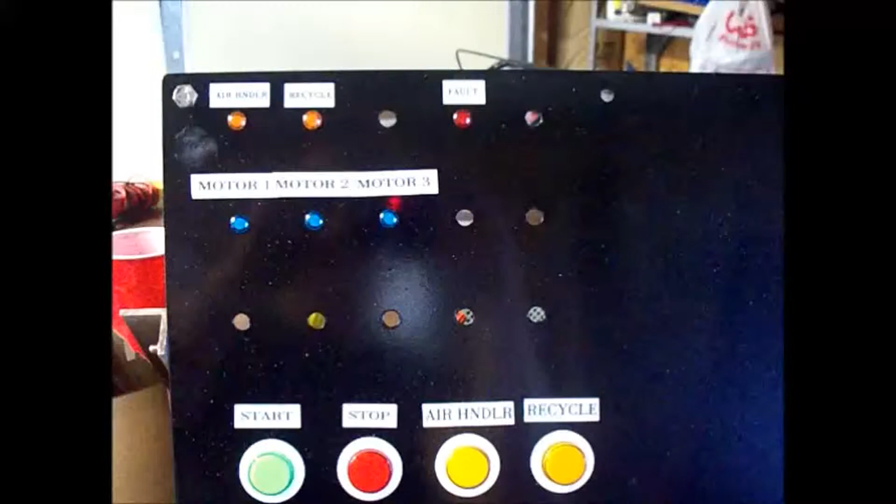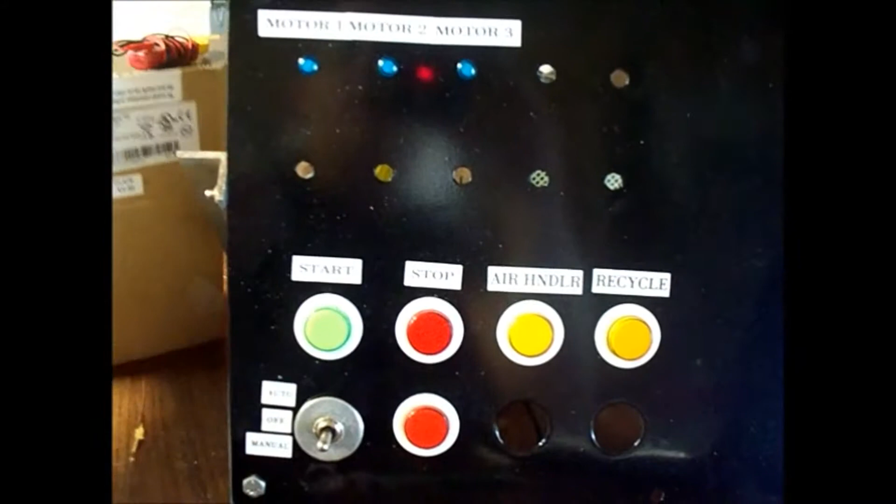This is going to be the first project that we're going to do with the Click PLC. It's the 110 version, input, relay, output, 3-COM port with the RS-485 included, not just the two 232 ports.

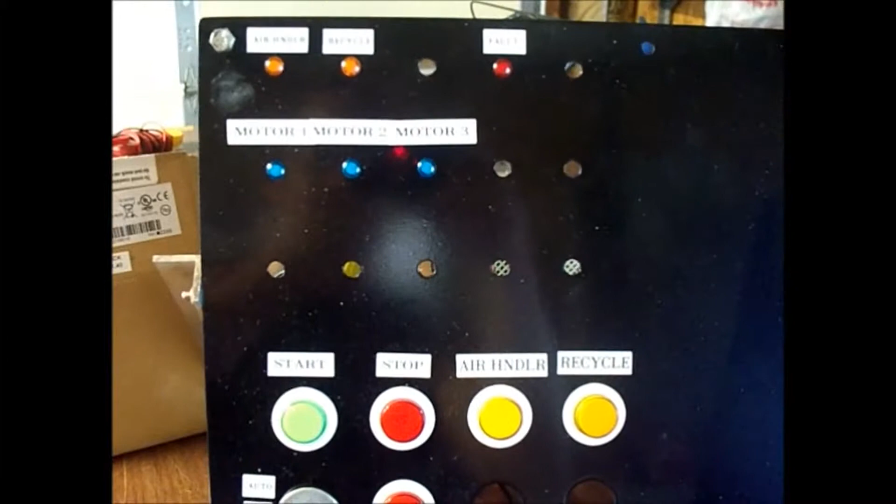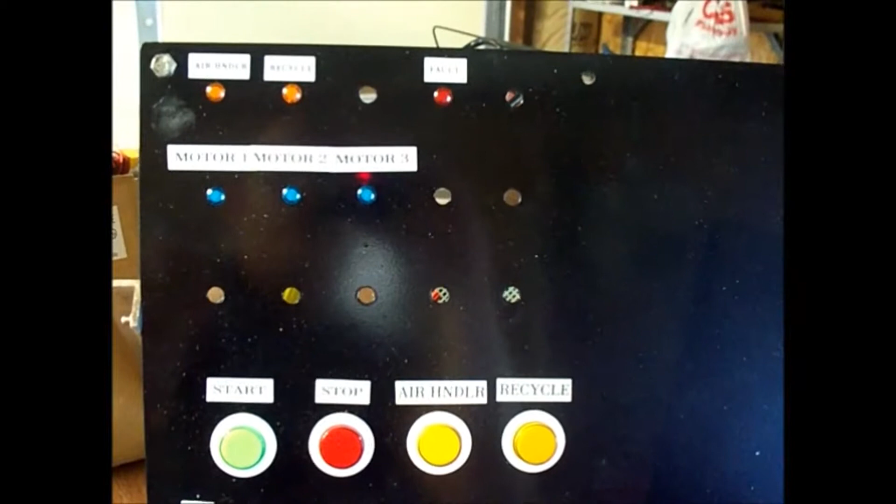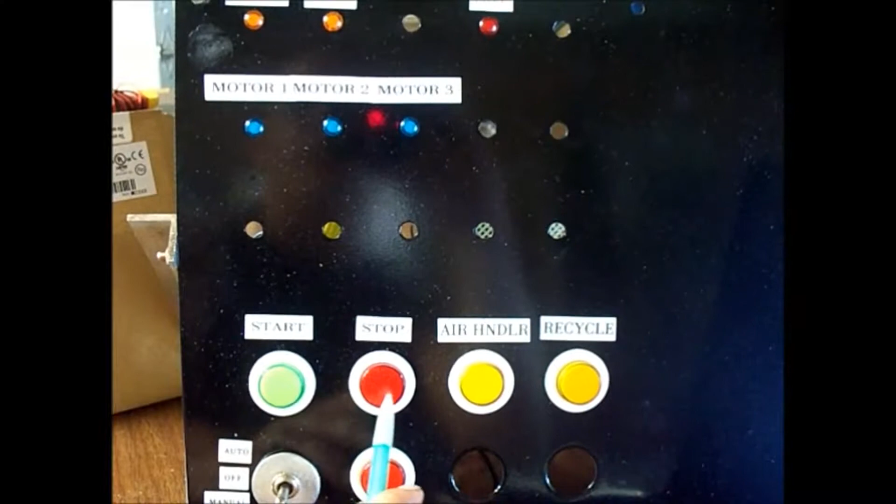This is a mock-up panel for me to do a lot of these projects, so it's not arranged for permanent fixture panel type stuff. This is just so I can configure different lights as outputs and different push buttons configured NO or NC for inputs.

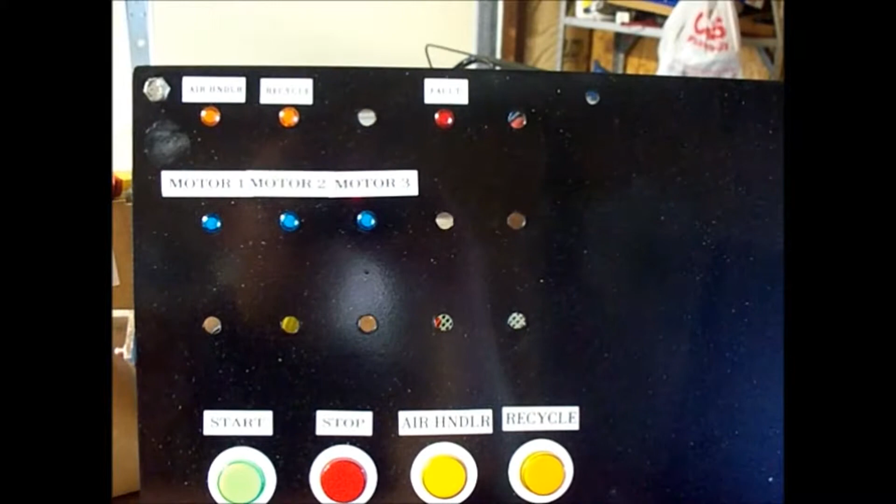This particular one that we're going to be doing is kind of modeled off of an idea I had after working on an abrasive blast machine that's got some really old control. Don't get me wrong, when it was commissioned it was probably the most current thing out there, but nowadays...

Okay, sorry about that. We had some full memory on this camera.

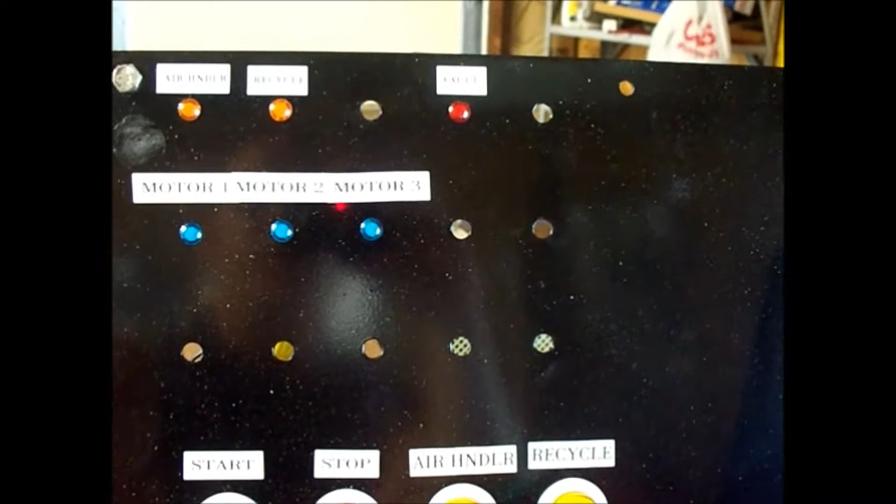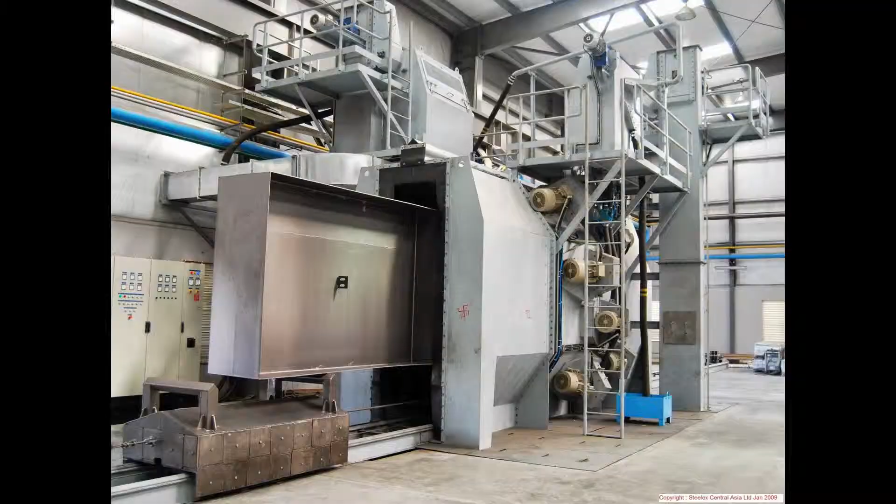Anyway, the control system on the machine that I kind of got this idea to do this for is pretty outdated. It causes some problems, and I kind of want to go through what some of these things are, what this machine does without having to draw a picture. It's an abrasive blast machine.

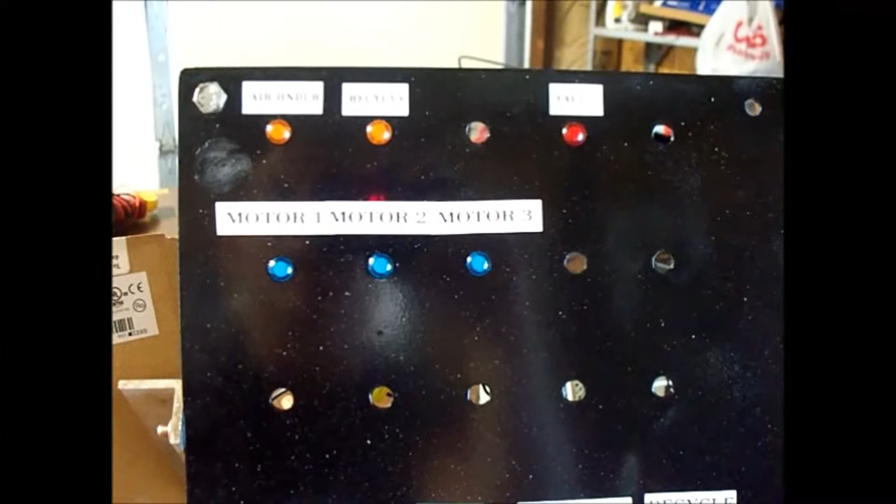It's a wheel type blaster where it has wheels turning, casting, throwing shot or abrasive blast media down on the workpiece very, very fast, and this abrades mill scale and rust off of metal. The wheels are powered by motors. The wheels are directly coupled to the motor shafts in every instance I've ever seen. And here, these lights are going to represent outputs of 3 motors.

These machines create a lot of dust, airborne fines and particulates, so there's always an air handler with a baghouse filtration type system, and this light is the output for it.

This light represents the recycle system, which can generally be several motor starters controlling motors that by mechanical means, after the shot or abrasive blast media has hit the workpiece and fallen to the bottom of the machine via gravity, the recycle system with augers and conveyors and elevators mechanically

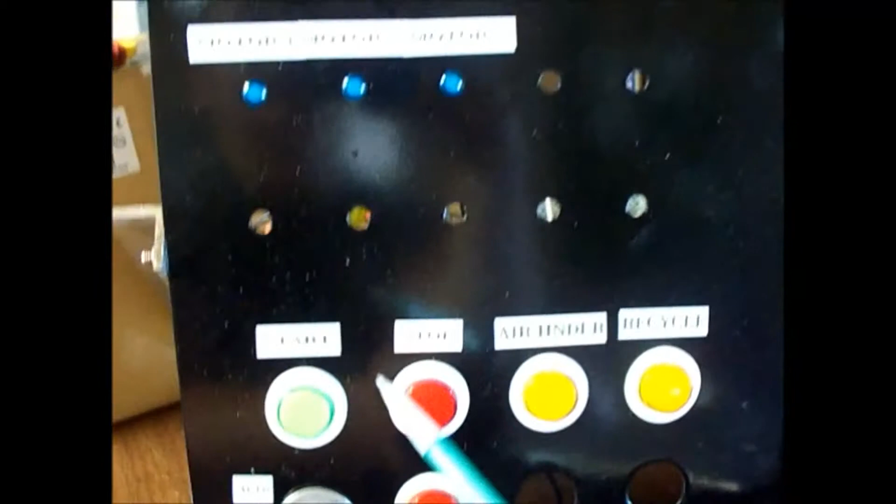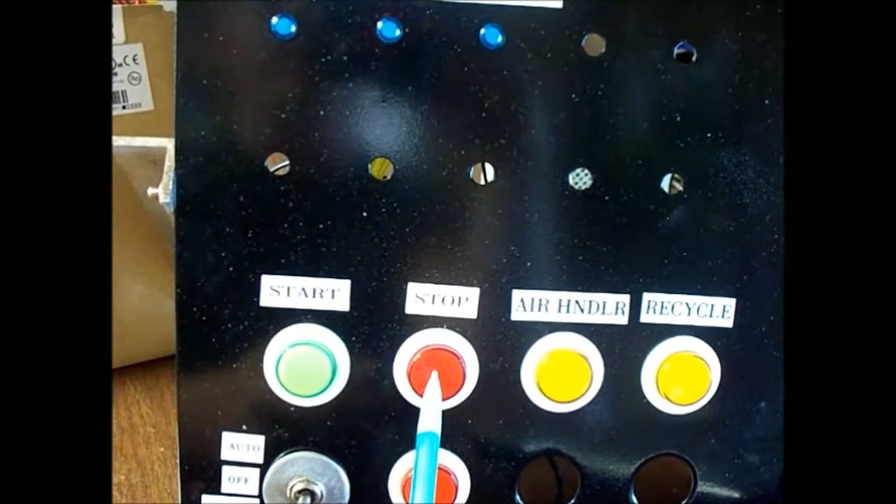Down here we have a start, and that's going to kind of auto start the whole system in a timed, orderly fashion. We have a stop, and this is an all stop. It doesn't replace an e-stop necessarily, but it's going to stop everything all at once, no order whatsoever.

This is a way to turn on your air handler manually. This is a way to turn on your recycle manually. Those are important because a guy can be cleaning up his machine.

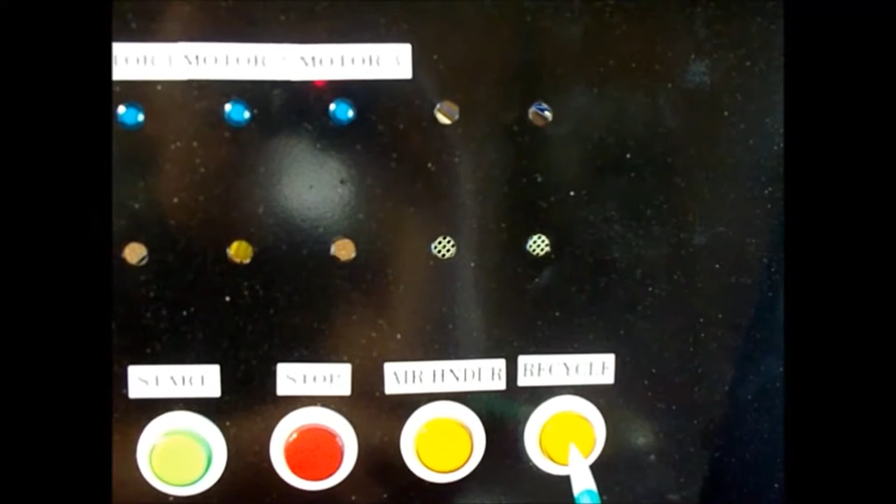If any material has gotten onto the floor and he needs to put it back in the machine, he doesn't have to climb up on top of it and put it in the hopper. He can run the recycle and just sweep or blow the abrasive material back to the machine where it will be recycled back up to a top hopper.

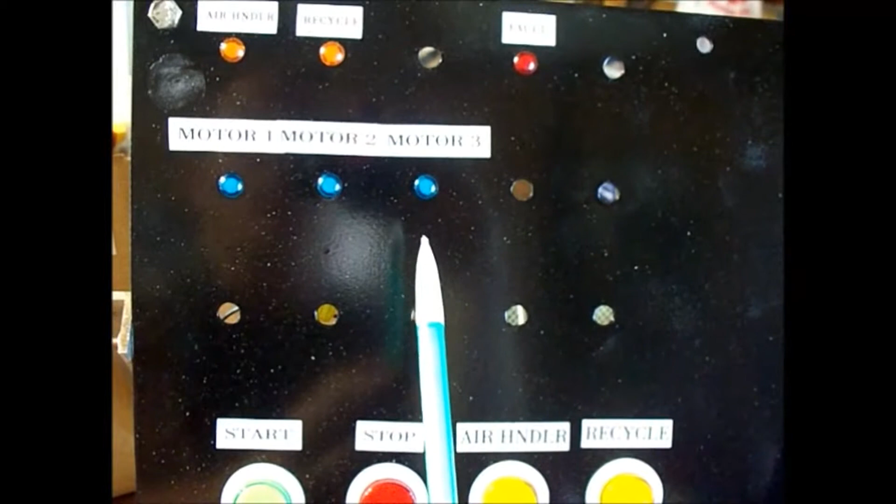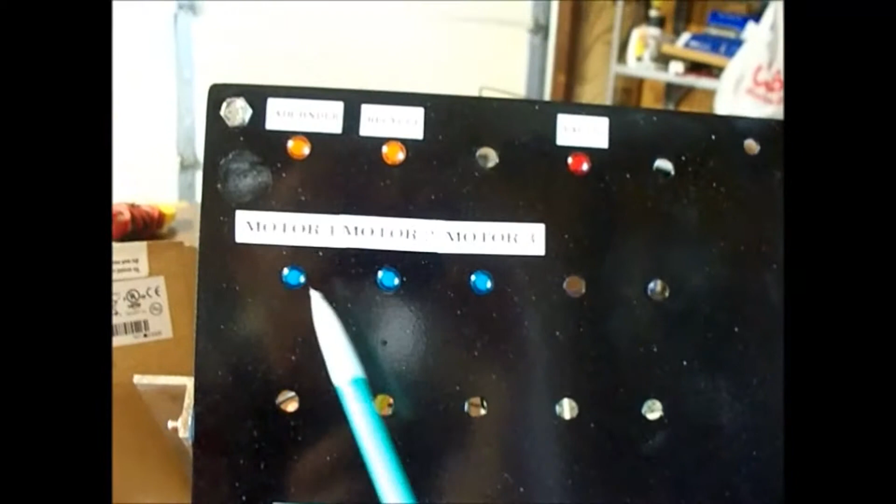While he's doing that, he may want to be breathing some clean air, so he can turn this air handler on manually. He can stop it with the stop button. He can stop the entire cycle after he hits start with the stop button. He cannot turn on the wheels, the motors, manually. We want control of that. We want to put conditions in before those motors will come on, namely air handler and abrasive recycle.

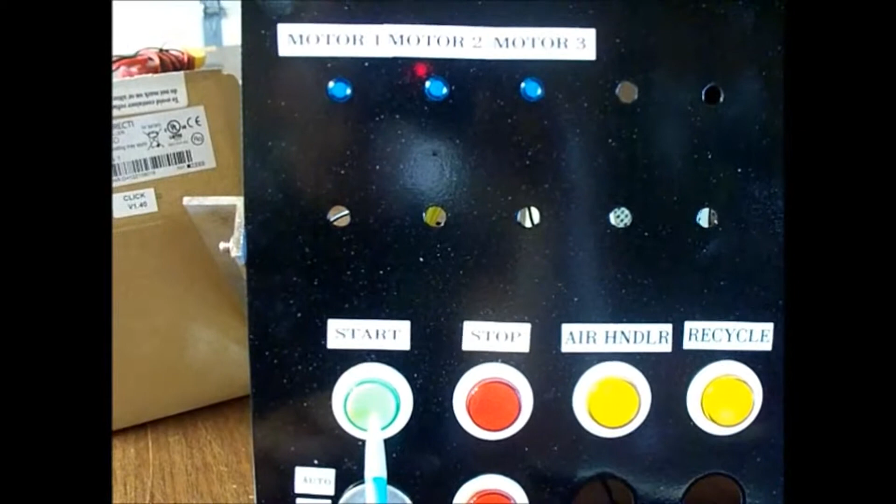So that's what this start button does. It takes the order and fashion that things happen out of the control of the operator, so he just starts it or stops it. Don't pay attention to this toggle for auto, off, manual. This is kind of a setup for some other different things that I've been doing. It doesn't apply to this.

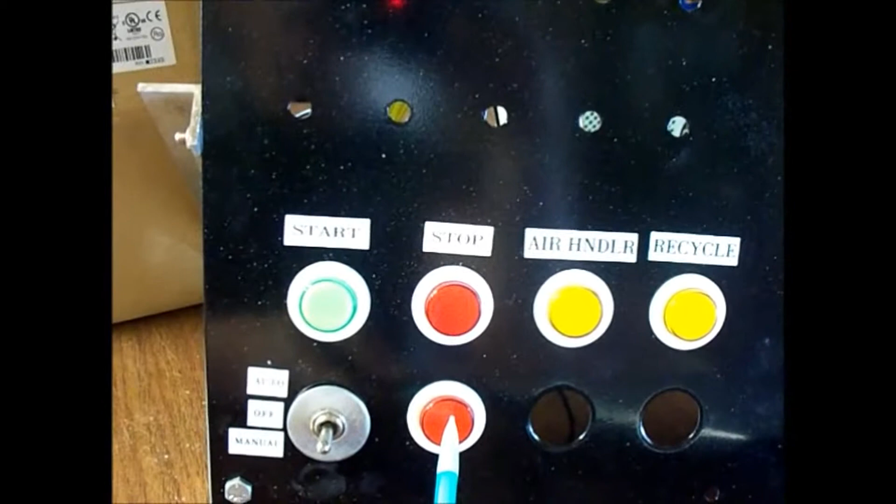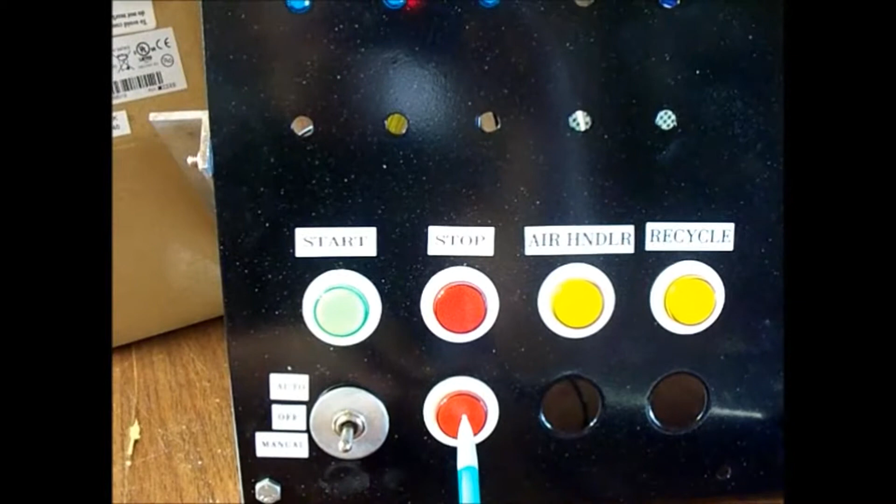This stop button that I have not labeled, yes, I haven't labeled, is kind of an organized shutdown, organized stop. This is when he wants to finish his blast session. He can hit this button. And unlike this one, which shuts everything off at once, this one will actually cut things off in an orderly fashion to prevent any jam-ups.

What it will do is, first it will shut off the abrasive blast wheels. It'll stop throwing the abrasive material. It will wait for a little while. Then it will turn off the recycle. After it feels that the recycle system has caught up with whatever was in the bottom of the machine, then it will turn off the air handler, at which point everything is reset and he could restart if he wanted or walk away.

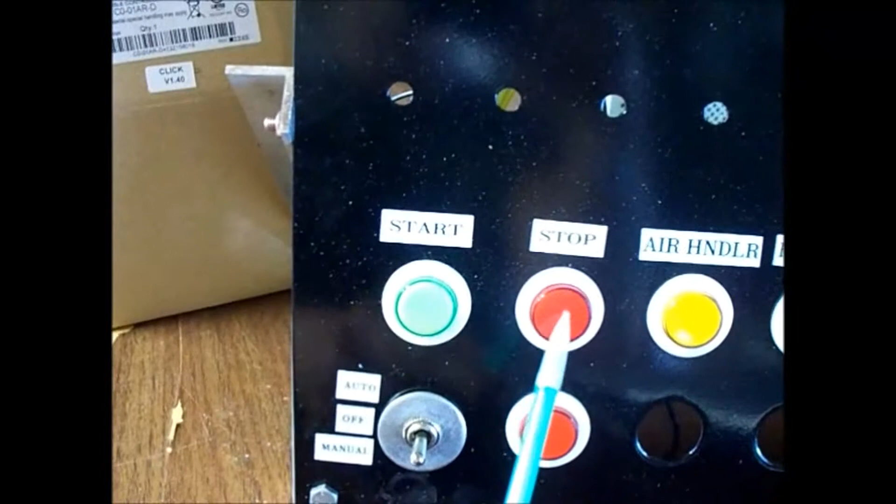The cool thing that I've got going on with this logic is, even if he presses the organized shutdown button, for some reason he hears a belt squealing, something's not right, he can hit that stop button right there, and it's not gonna wait for that whole timed shutdown. It's just gonna shut it down right then. But if he's just stopping his blast session, this is a better one.

He can just hit that and know that the wheels will shut off, the motors will shut off, and we can change values on this, is the great thing. A little bit later, recycle will shut off, and a few seconds later your air handler will shut off. It's pretty cool. I like it. Once I get the recycle fault sensor going, it's really going to be pretty neat.

I don't know if I'll be able to show you the ladder logic on this video. I'm going to have to figure out how to take screenshots and insert them. I find it intuitive. This has been my first PLC program. I've not really received formal training for PLC programming. I'm just a maintenance guy. I've worked with ladder logic a lot before, and I'm taking the opportunity.

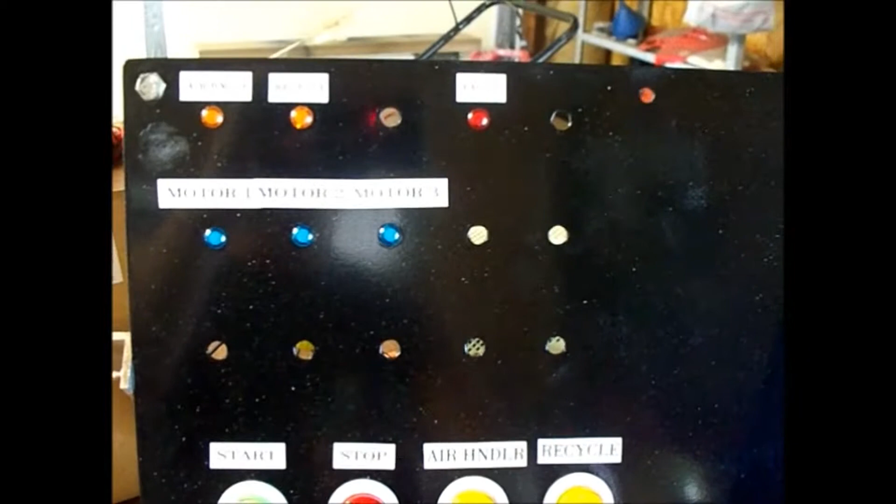I bought a Click PLC, did a lot of learning, did a lot of messing around, built this little trainer panel, and now anything that comes to mind, I'm kind of designing control to see if it fixes it. Not that it'll ever be used where I work, I don't know, but they're ideas, and you got to foster your ideas to make things better. That's the point.

I want to use all the instruction list and then start looking at data and math and analog and all the other good stuff involved with this, and just do it. Just make examples, control examples, based on things I've worked on.

So we're going to go ahead and fire this up. Okay, I hope the light's all right. Okay, I'm going to hit the start button. When I hit the start button, we all see air handler come on right away, and then we ought to see recycle, and then we ought to see wheels or motors come on one at a time. So air handler comes on, a few seconds later recycle comes on, a few seconds later motor 1, and so on.

Okay, and there's your timed orderly fashion. Make sure that that recycle and that air handler is on before the machine starts doing its messy business. They're safeguards to protect the machine, to protect the operator.

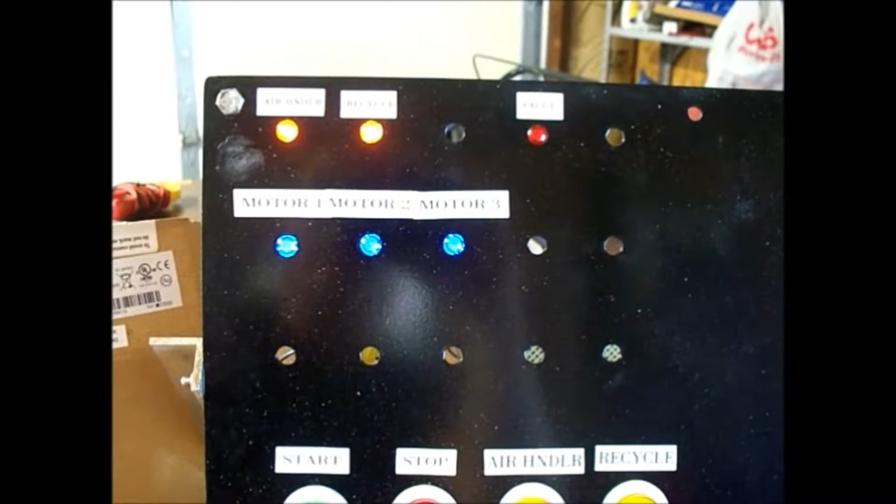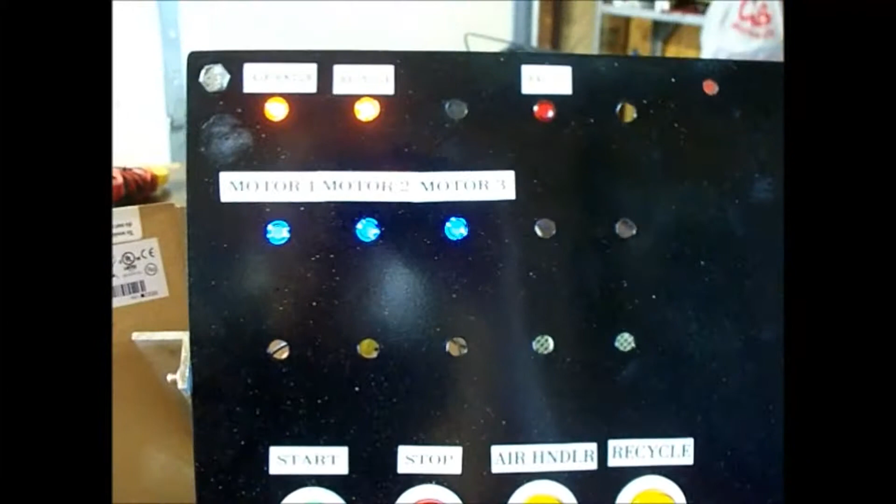We're doing this all with timers that would normally cost, bottom of the line timers probably cost $35 a piece for on delay electromechanical timers. We're doing this with a $100 PLC, and so far, look at how many timers we're using. This is a drum instruction that I'm actually using to do this. It's pretty neat. It's kind of one of the more advanced instructions with the Click, but I found it pretty easy to use. The software was really intuitive.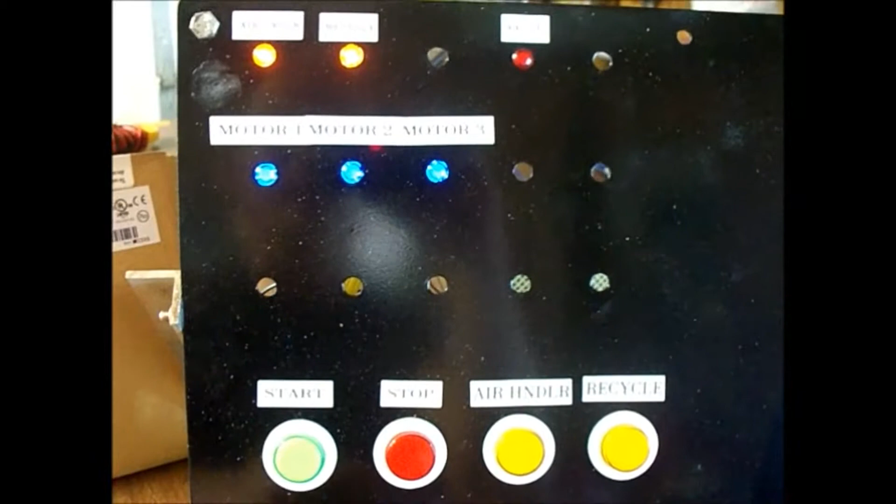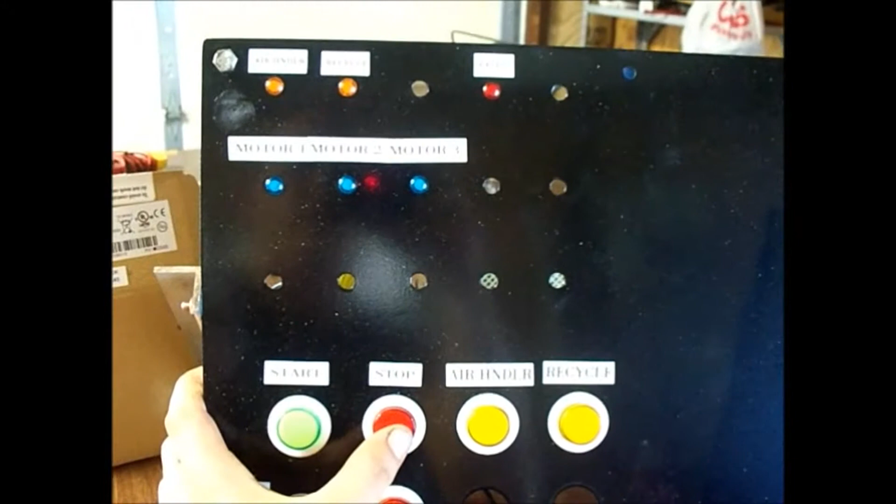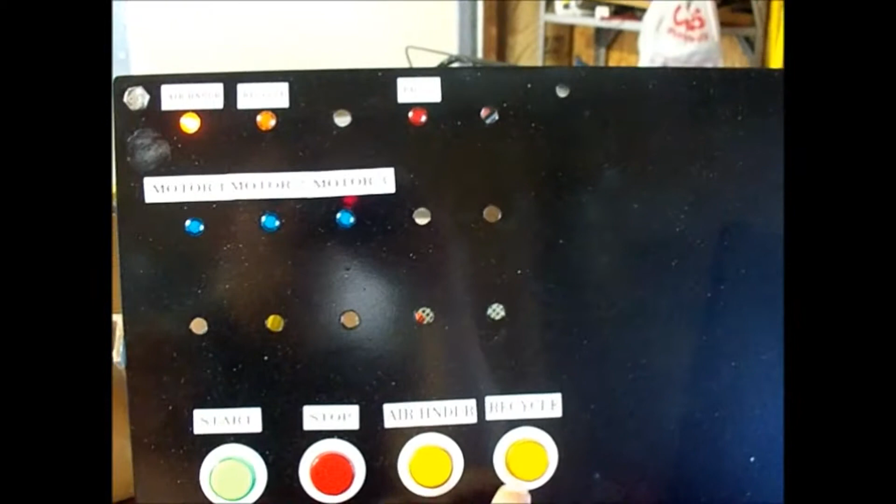Okay, I can hit the stop button, and it's going to kick everything off all at once. Okay, so turn it back on. If I need to stop it in the middle of this, I can stop it. I don't have to let it all come on. Okay, I can also turn on air handler and recycle manually. That's good. You want that for an operator to utilize certain functions when he needs to.

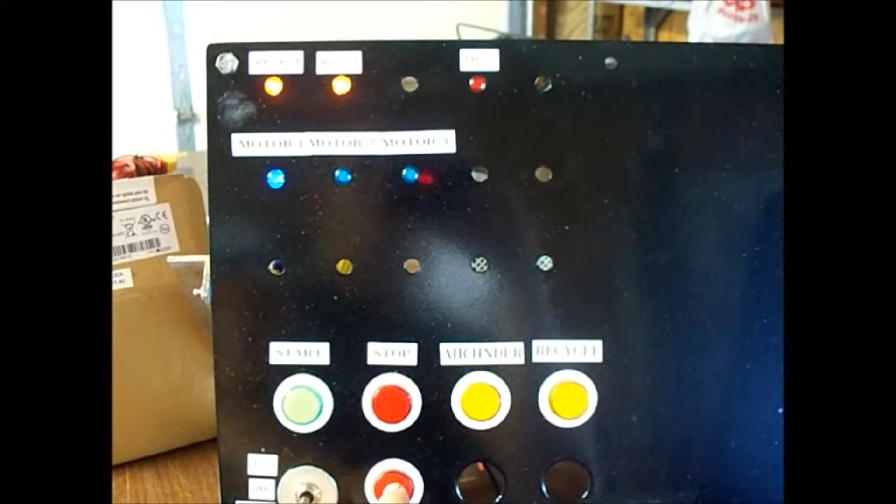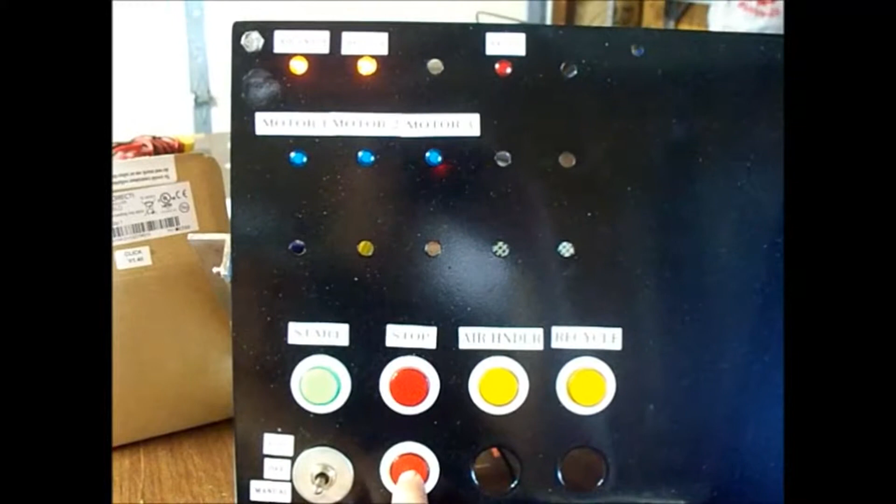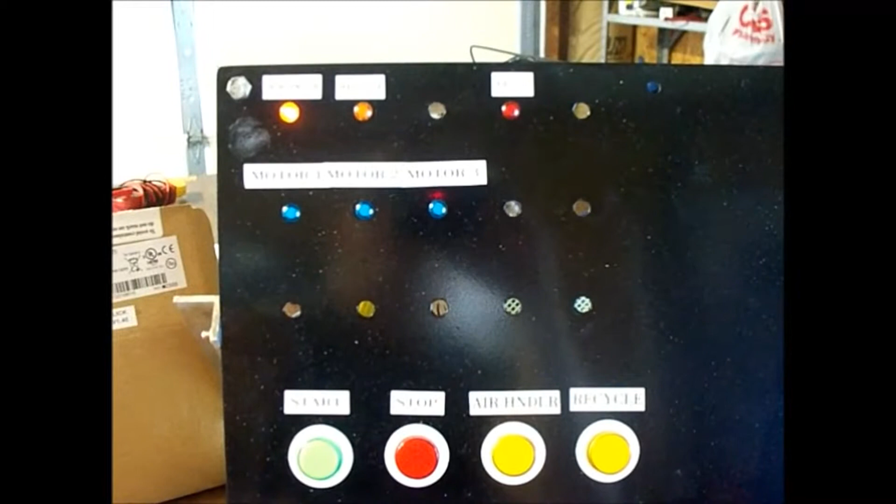And the last one, we'll go ahead and turn this on, is the organized shutdown or blast session end. I didn't put a tag on it because I don't really know what to name it. None of the machines that we have utilize this particular function. I thought it would be kind of handy. Maybe it was just a waste of my time. Okay, everything's on, so I hit this. It automatically shut the motors off. Recycle will go off. Bada bing.

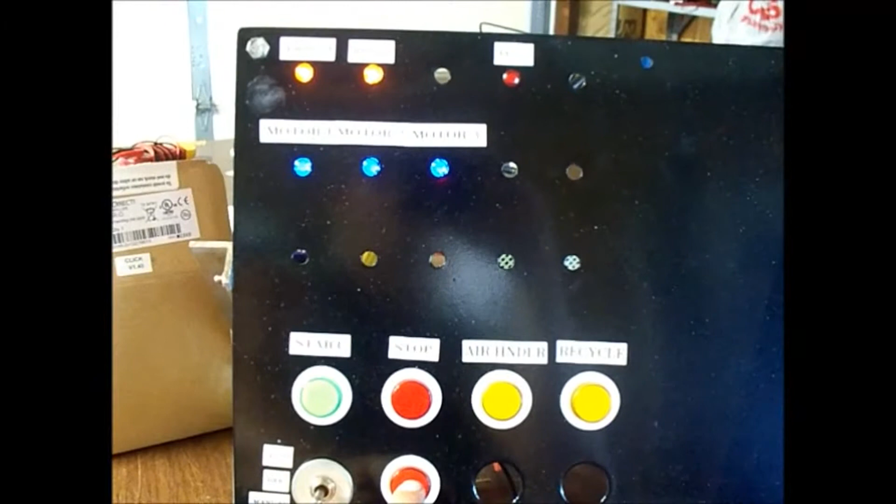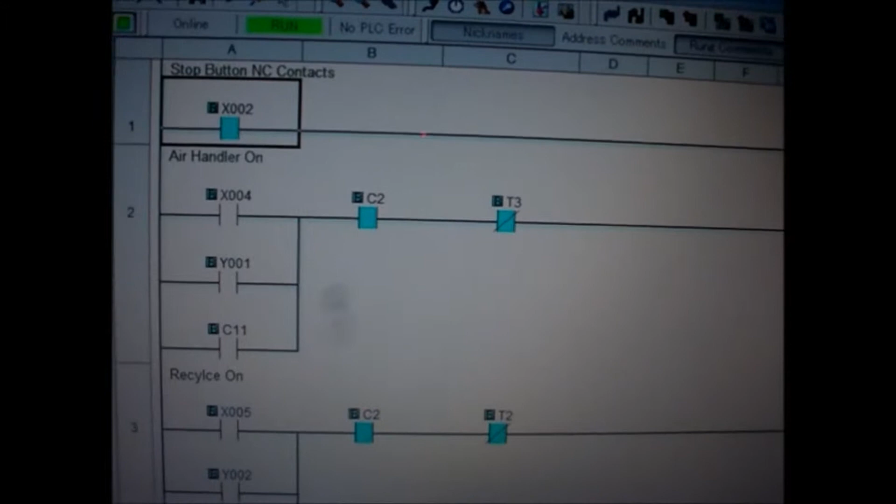Now, let's say we have it on and everything's on, and we want to do an orderly shutdown. We do the orderly shutdown, wheels kick off, we're like, oh no, something sounds wrong. We can hit that stop even though we're in that orderly shutdown cycle. All the rungs, I don't know if you'll be able to see them or not. All the rungs like this air handler on. That right there, that is the all stop button.

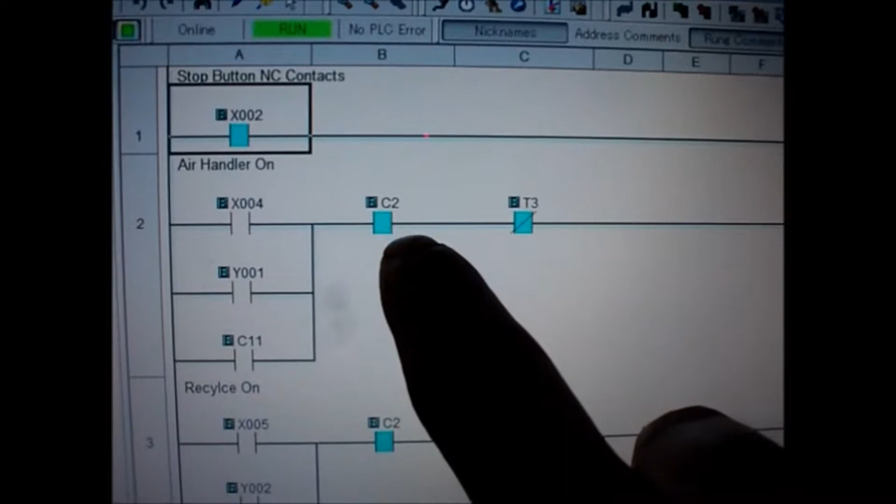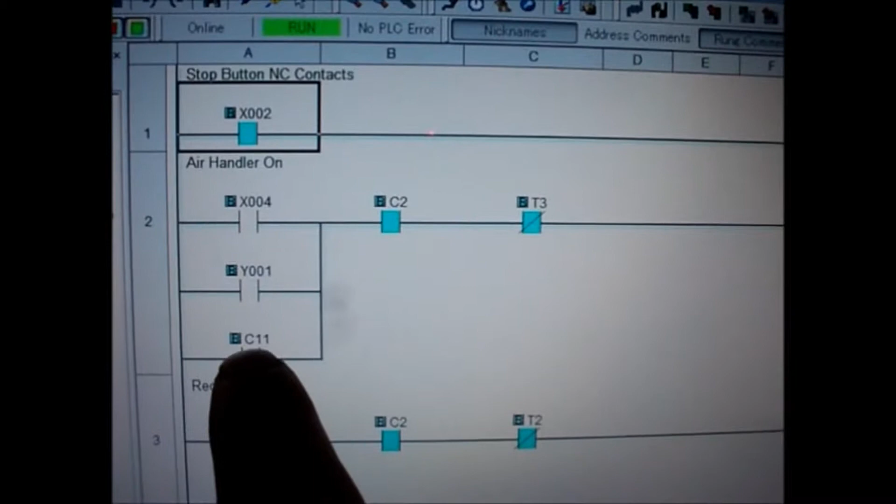Stop it all right now, and that's after a three-way OR, where the switch can turn it on. There's the seal in from that particular output, and then there is a bit from an internal control relay that my drum acts on. My drum acts on internal control relays. It doesn't act on outputs. The reason is because you'll get syntax problems if you try to name an output coil, a real physical output, more than once in the program. It doesn't like it. You could probably get away with it.

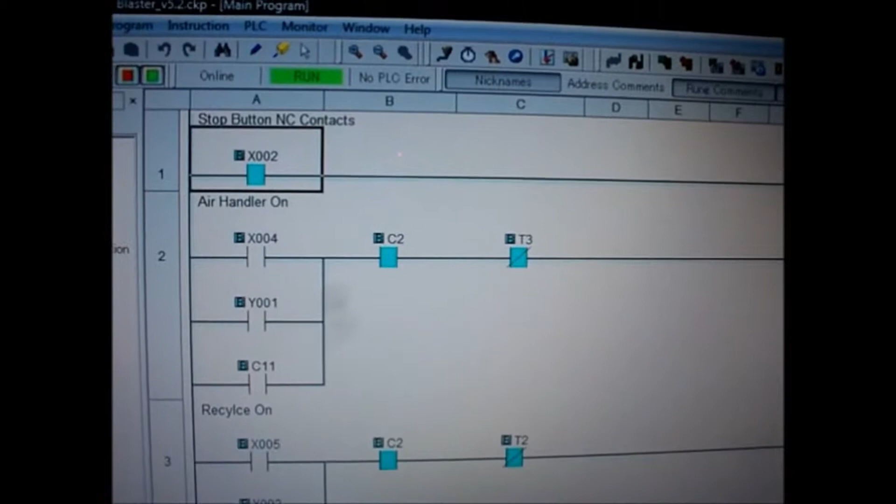It's not an error. I think it's just a warning, because don't forget, if you have multiple rungs with the same output, the last thing to get scanned is the one that will be true, not really what the logic says. So drums are better done with internal control relays as what they turn on, and then use contact bits off of those to mess around later on and get the air handler.

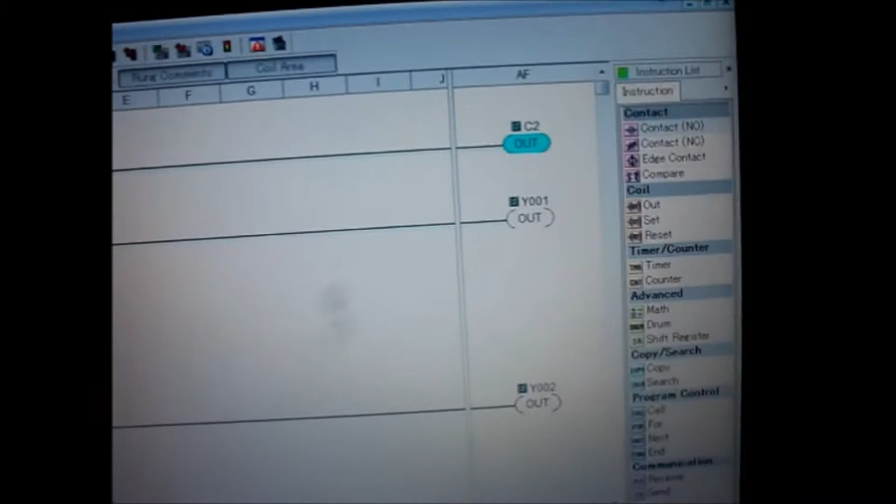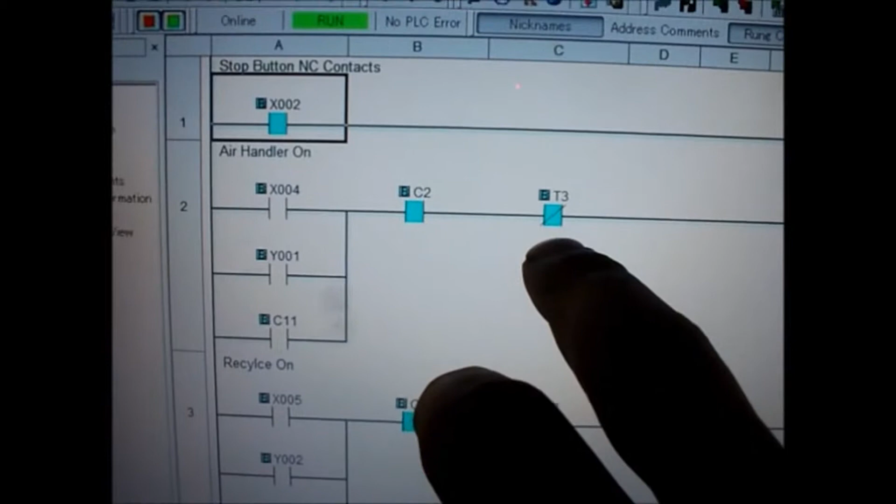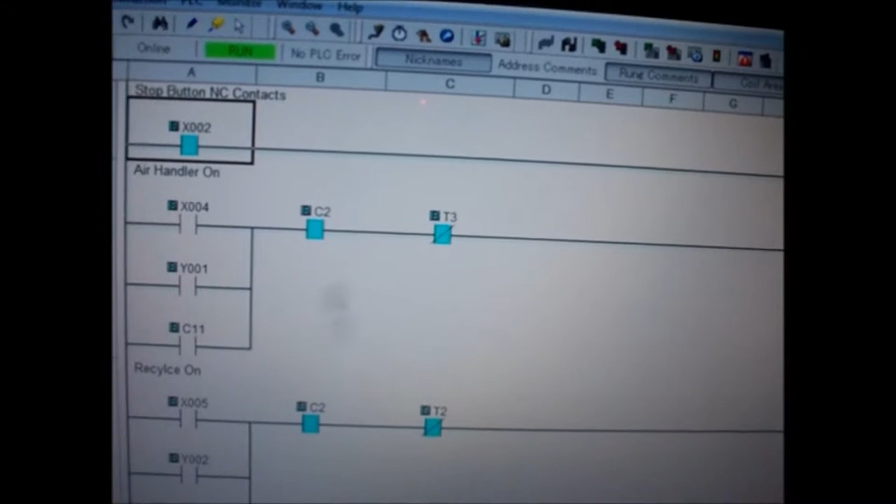So there's our stop button, and it's wired normally closed, so it's made through here, and then here's a true if off. That is our organized stop. Okay, so our organized stop is getting a true if off until a timer kicks on. Then when a timer kicks on, it sets that T3 to be true, and it will open that up. But even if it's timing out and waiting on it to open up, you'll still notice that

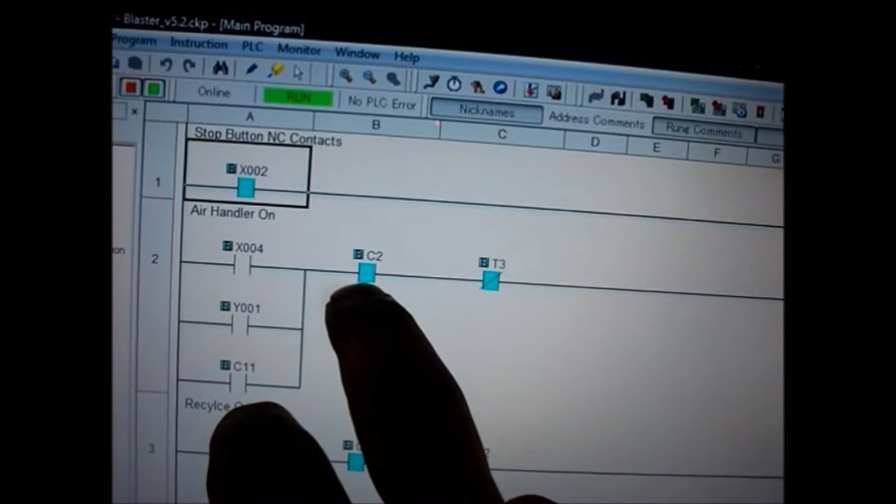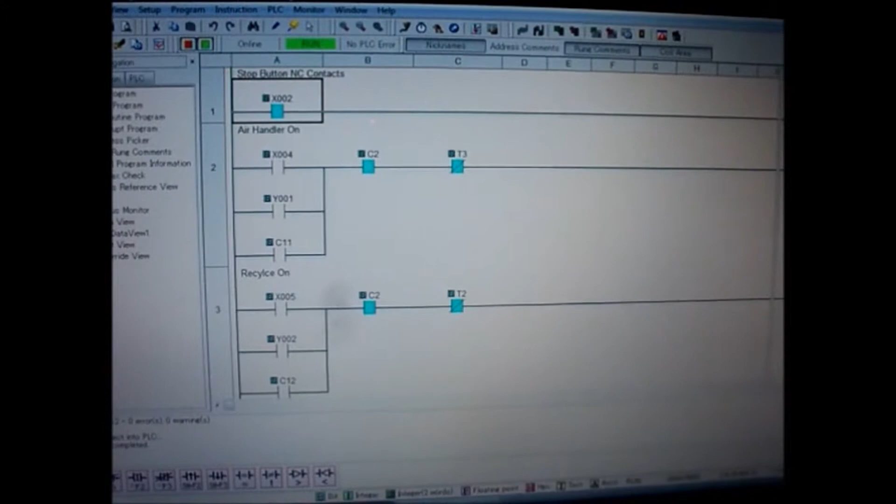that C2, see right here, that input is the stop button, and it is tied to C2 out. So that is the stop, and it will happen regardless of anything else that's going on in the system. That's always kind of the first AND condition in these rungs after my OR logic on what I'm using, either a drum or a timer to turn it on. Kind of weird. I may not be explaining it that well, but it works. I'm pretty excited about it.

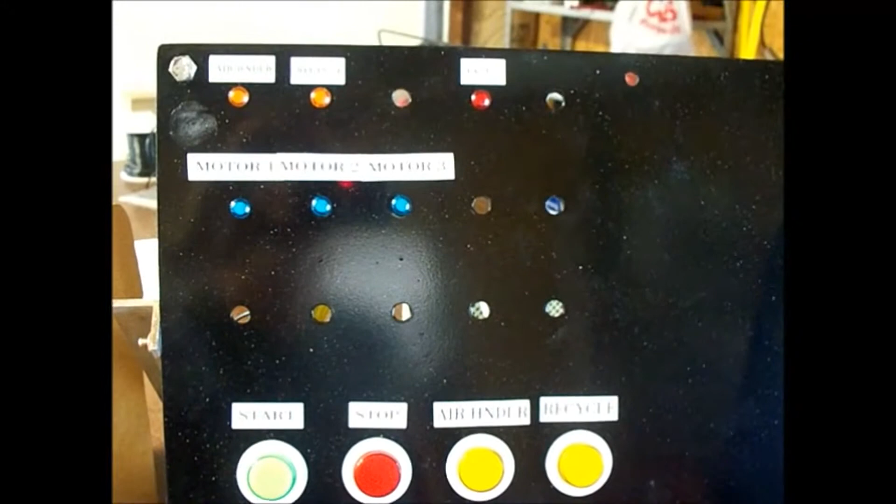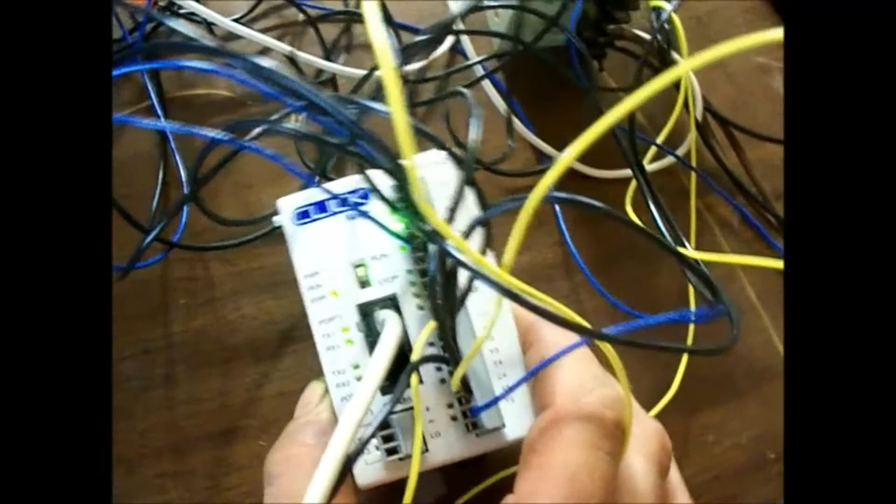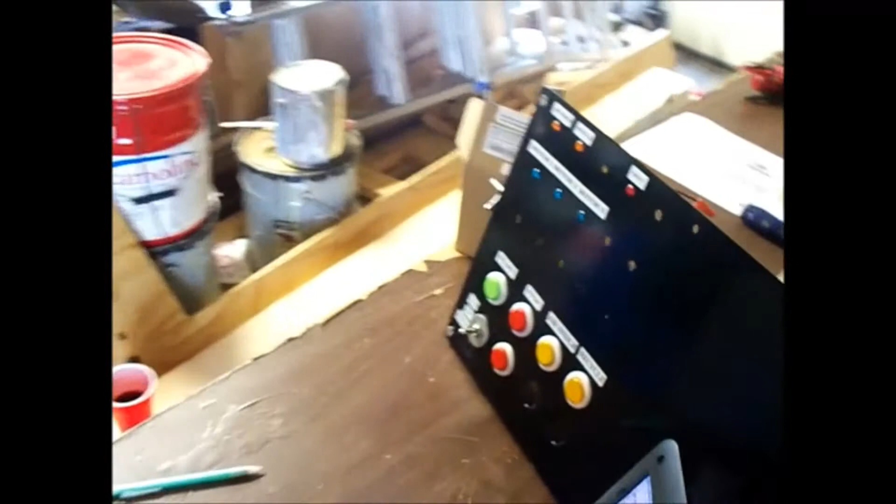All this is done with this little thing. It's half the size of a NEMA 2 motor starter. It's small. It's really small, very small. So it's got a lot of power. I don't know how many timers you could say that we utilized here, for on and off. Best case scenario, you could have played with a lot of wiring and some ice cube relays and done it with, I guess, five or six timers, 5 probably.

And then maybe 15-20 bucks a pop for ice cube relays and their sockets. You just have an unlimited amount of flexibility with these PLCs, and the cost is, I paid $109 for mine, 30 or 40 bucks for the control cable. Input and output modules are less than $100, usually 40 to 50. Analog is somewhere around 100.

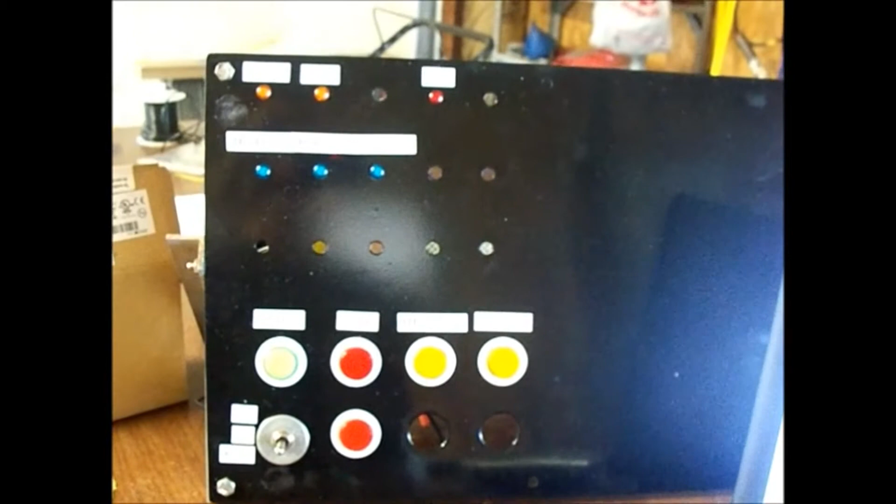It's really the way to go. You don't want to stay with this old control when you can just clean things up, tidy things up, and the programming is super easy. Like I said, I've never taken any classes for this.